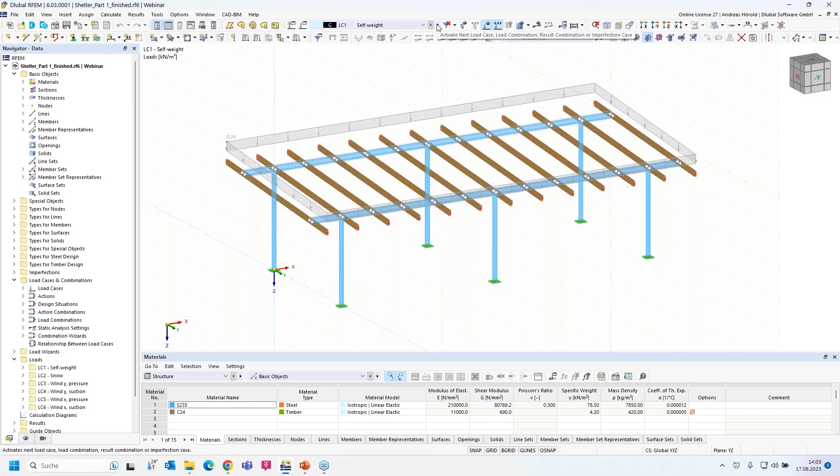Then I open the program. This is the state from the last webinar, the first part we presented last week. I created this model and the different load cases: self-weight, snow, 2 wind load cases in the Y direction, and 2 wind load cases in the X direction. I go back to what we selected last week in the base data.

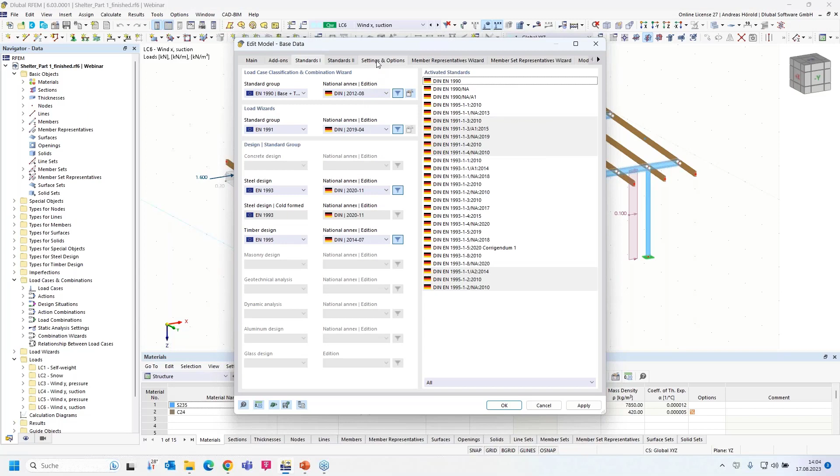I activated the 2 add-ons, one for steel design and one for timber design. Also the combination wizards are checked, and I selected the different Eurocode standards with the German National Annex. Under settings and options, I activated the member representatives and the member set representatives. I would like to design only one representative, for example, and all members with the same properties, the same length and same cross-section, are collected in one representative, and I design only that one. In the member representatives wizard, all steel and timber design properties are checked, and the same for the member set representatives. I'll leave the dialog and start applying the imperfections.

On the left side you can see the data navigator and the imperfections folder. First I have to select or create an imperfection case. I can do that with a right click and then New Imperfection Case. The imperfection case collects the imperfections.

After creating the imperfection case, I need to create the imperfections. The main advantage of the imperfection case is that you can create a group of imperfection cases. That's necessary, for example, for buckling design according to the GMNIA method. That's the main advantage.

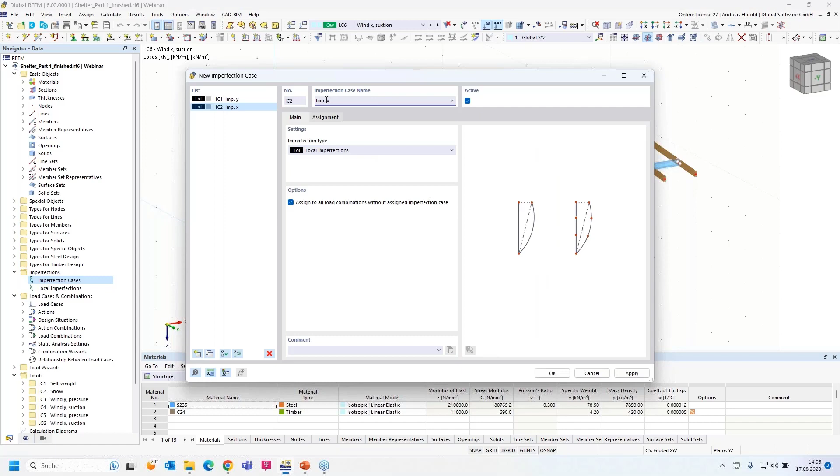So I create the imperfection case imp_y and assign this imperfection case to wind load cases 3 and 4, the two load cases with the same Y direction. Then, at the bottom left, I check 'create new imperfection case', call it imp_x, and assign the wind load cases in the X direction.

In the background, you can see the combinations are created automatically. You see only combinations with wind load cases 5 and 6, not with load case 3 and 4 anymore. Now you can check that here. Same for imperfection Y - you can't see any combination with wind load cases 5 and 6, only with 3 and 4, and of course the other load cases, load case 1 and load case 2, the snow load case.

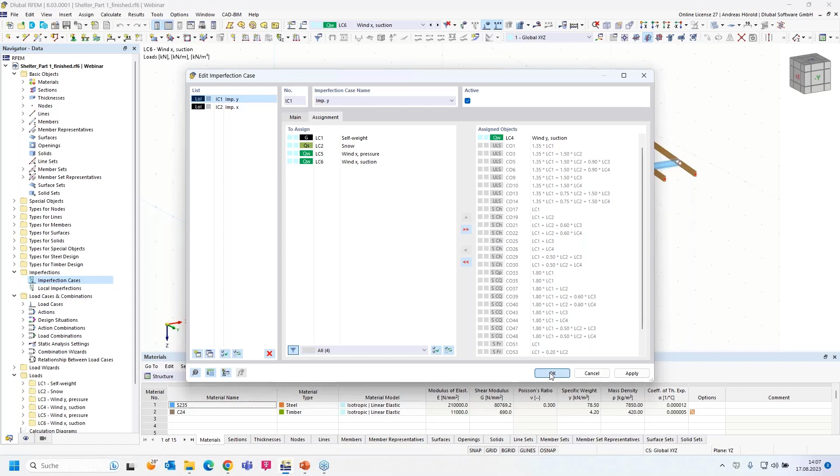I leave the dialog, and then in the data navigator I can open the local imperfections, and for example under the folder imp_y, I can create a new member imperfection. With a right click on it, I can select New Member Imperfection. The other way is to go above and select the button New Member Imperfection.

So the right imperfection case is selected. I would like to create an initial sway and assign it to the steel columns. I will use the equivalent member method in combination with imperfections and calculation according to second order theory. That's sufficient for the design according to the equivalent member method.

Okay, this definition type, Eurocode 3. The coordinate system is local xyz. I forgot to show the member axis systems. I select Y, I know that from the test.

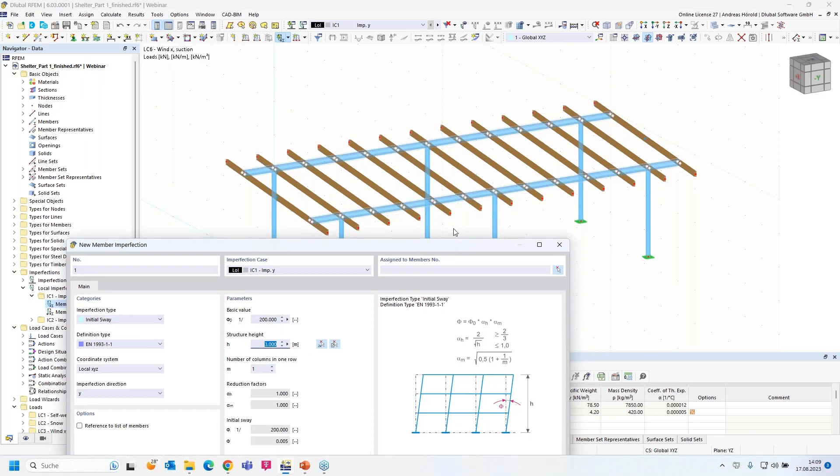So then I measure the structure height. I measure the longer column, doesn't matter that this column is a little bit shorter. Two columns should be in one row, this one and this one. And I can select or press OK.

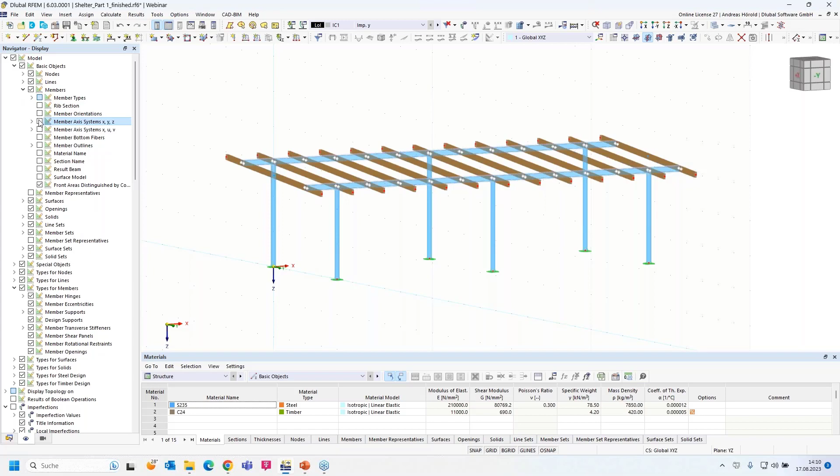And I need to select the different one. Okay, I must go in the dialog again. But before I do that, I go in the navigator display. So, and then under members, you can find the member axis system. So now you can see the local member axis system.

So now I go back to the navigator data, double click on the initial sway, and you can see the local Y direction. This direction is the same as the global Y direction. So, and I assign the different columns.

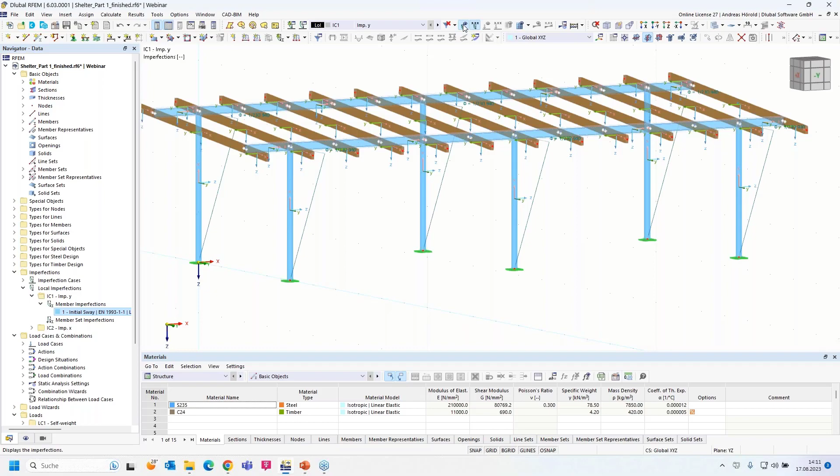Okay. And I have to select this button above, show imperfections. So the imperfections are created correctly.

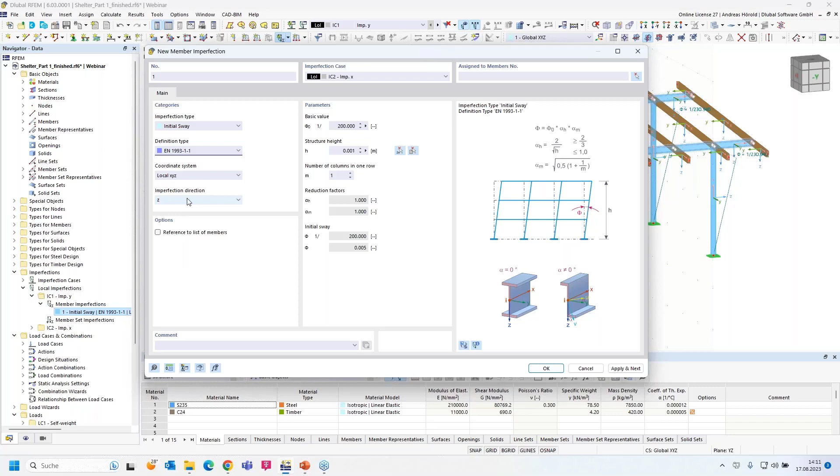So then the next imperfection, new member imperfection. This time I have to select the imperfection case 2, imp x. Again, initial sway according to Eurocode 3. This time imperfection direction z. You can see this is the local Z direction, it's the same direction as the global X direction.

Structure height is 3, and 3 columns in one row. Okay. And I select the different columns. So I select the other imperfection case, and you can see that the imperfections are defined correctly.

Okay, then we can turn to the load cases and combinations. Here on the left side, navigator data. I right click on it and open the load cases and combinations.

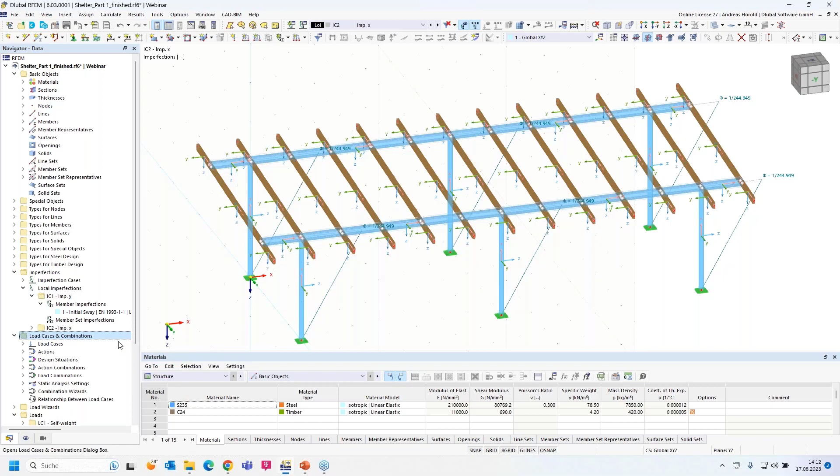That's what we defined in the base data: the Eurocode 0 and the German National Annex, and of course timber, because parts of the construction are from timber. When I edit the parameters of the National Annex, I can see the KDEF factor. It's service class 2 and it's 0.8.

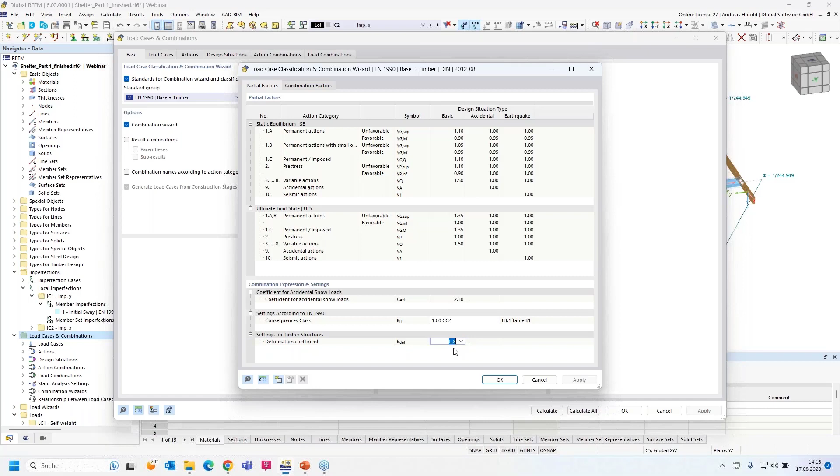Okay, so the combination wizard is activated. Those are our load cases in the next dialog. Then the actions, and for the wind load cases it's important that the alternatively action type is activated. It's done automatically, you can see the 4 different wind load cases, so that we don't have, for example, more than one wind load case in one load combination.

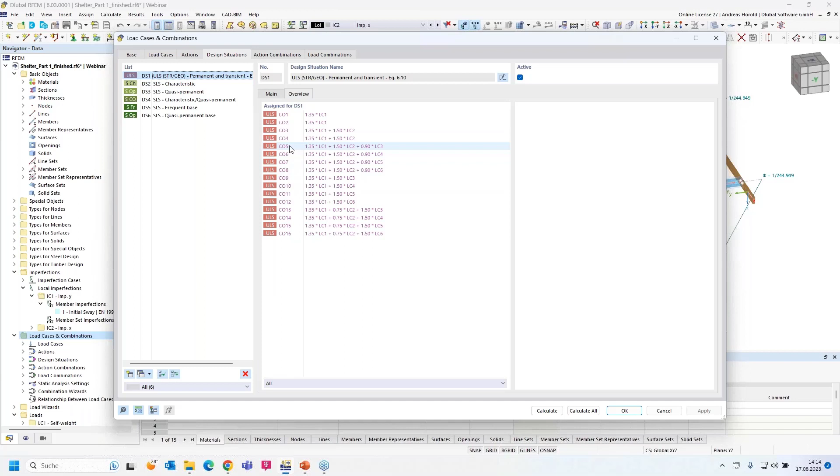Then the design situations: 1 for the ultimate limit state design and 5 for the serviceability limit state design. If you click on one of them, you can go to the overview and see the different assigned load combinations.

And in this dialog, you select or activate the add-ons. You can also assign concrete design. If you activate the add-on, we activate, for example for the ultimate limit state design, the steel design and timber design add-on. Let's go to the action combinations.

And it's the important thing, the load combinations for ultimate limit state design and serviceability limit state design. At the moment we have got 60 load combinations.

Let's go back to the design situations. Of course, we will activate the steel and timber design for the ultimate limit state design. For design situation number 2, the serviceability limit state design characteristic, we also activate steel design and timber design. Yeah, that's all for the steel design.

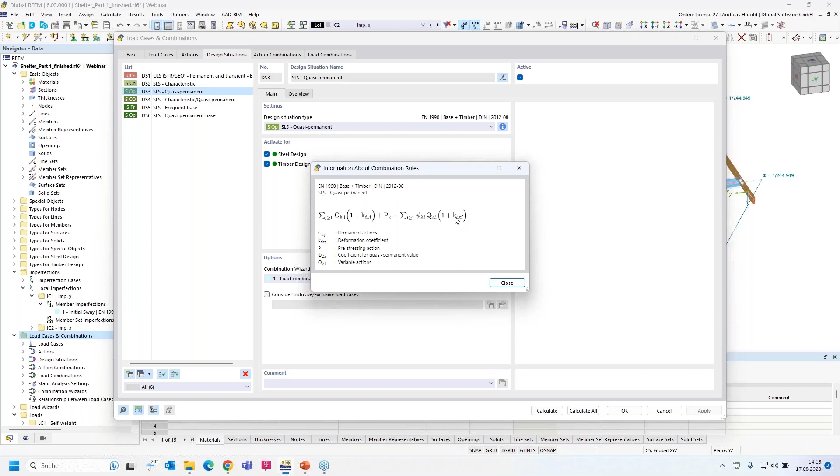And we check if we need this serviceability limit state design quasi-permanent for the timber design. I go to the info button, and you can see in the combination rules the KDEF factor, what's quite important for the timber combinations. That's why we need this design situation for the timber design.

You can leave the dialog, uncheck the steel design. We check the same for design situation number 4, information, and we can see the KDEF factor again. That's why we need it also for the timber design.

And we don't need it for the frequent base. You can't see the KDEF factor here. So that's why I delete these 2 design situations.

So again, this design situation, design situation 3 for timber design, and 4 also for timber design. With the Shift key, I select the 3 serviceability limit state design situations and check the geometrical linear analysis. And for the ultimate limit state design, the second order theory.

So now we go back to the load combinations, and you can see there are 45 load combinations. Let me check if all is correct. Yeah, all should be correct. So that's all for the combinations.

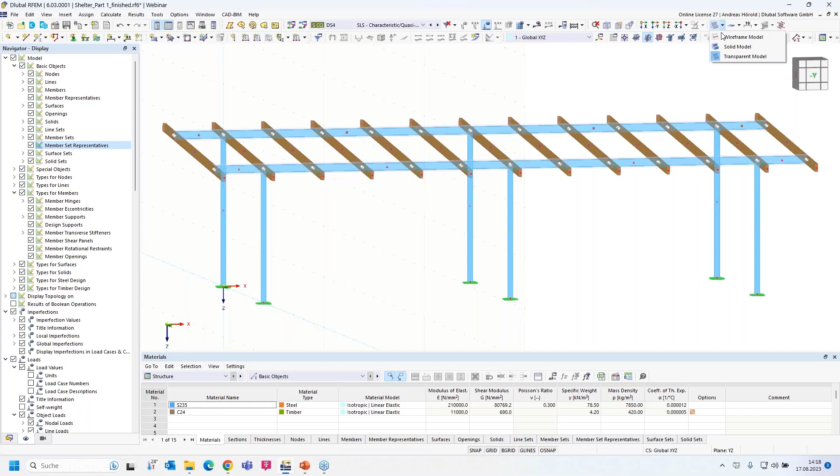You can see these 3 columns are in a group, in the same group. It's the same member representative, member representative number 4. Now you can see that in the different color of the points in the middle of the member.

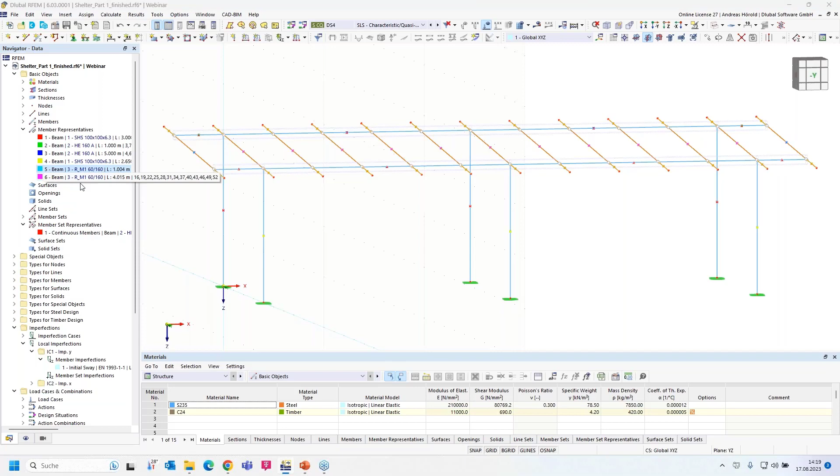So I go left on the bottom in the navigator data to the member representatives and the member set representatives. That's the timber representatives. You can see that's the cantilever beam, and that's the inner beam here. And I start with this inner beam made of timber.

Okay, then I go to the design type. You can see the service class number 1. That's not correct. I edited the service class with that button and change the service class to moist.

You can see this preview image. That's what valid for our structure. You can see the timber structure on the outside, but there's a roof over the timber structure. That's the case for our structure.

Okay, I don't define any effective lengths. We don't do stability analysis for the timber beams. I assume that I've got formwork, nailed formwork of timber on the upper side of the purlins, or a stiff plate nailed on the upper side of the purlins. And it should be quite stiff.

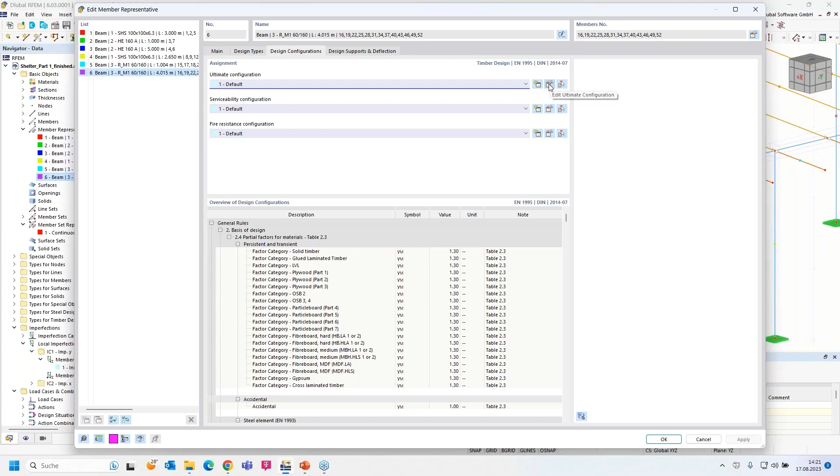So I go to the design situation, ultimate configuration, select the edit ultimate configuration, and I uncheck the stability analysis. Okay, and yeah, we leave the standard parameters. I apply with OK.

So I go back to the design situation, serviceability configuration. I press the edit button, and I leave the parameters from the standard. Okay, and we don't perform any fire resistance design.

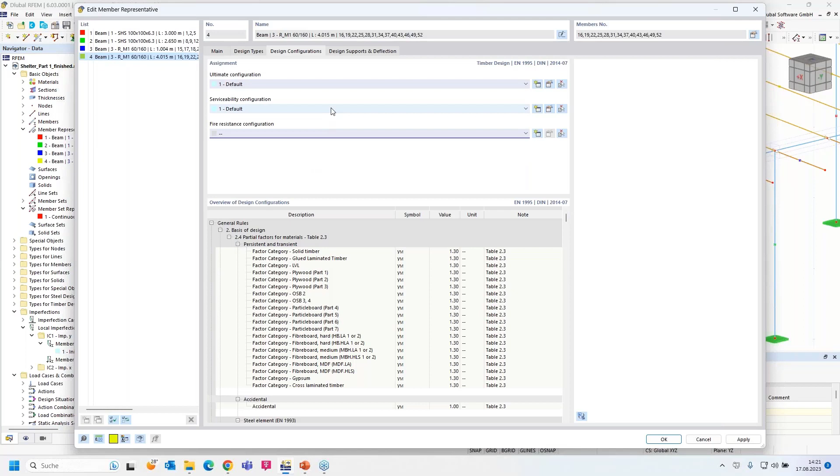So the next dialog is the design supports and deflection. Now I have to enter a support at the member start and the member end. I press this button, create new design support for member start. The type is timber, direct support. The support length is 160 millimeters.

Yeah, that's the width of the steel beam, the HEA 160. The support width is equal to the width of the member, of the timber member. If you change the width of the timber member later, it will be calculated automatically or changed automatically.

It's an inner support. We do the design only one time for this member and not for the cantilever beam. And we say it's an inner support, that the program uses the complete length or the complete width of the support. In our case, the steel member.

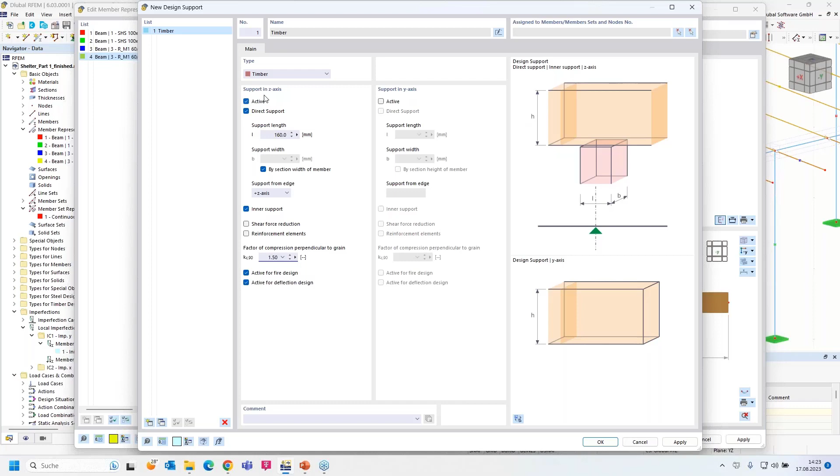So I need to define the factor of compression. I select 1.5, softwood, discrete supports. Okay, so it's only supported in Z direction. Okay, so the design support should be at the member start and the member end.

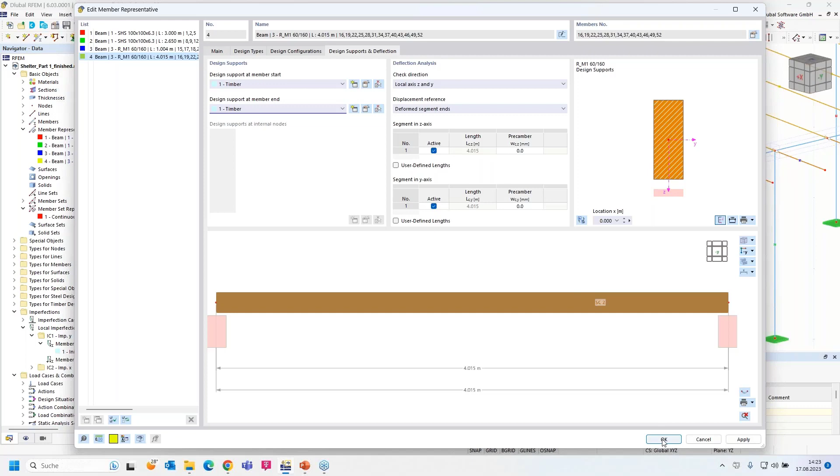Okay, yeah, that should be all for the timber design, but I checked the beam number 3, the cantilever beam. Design types, the same service class 2, the same design configurations, no fire resistance design, and we don't need to define any support. We design the support with the beam number or the member representative 4. Okay, that's all for timber.

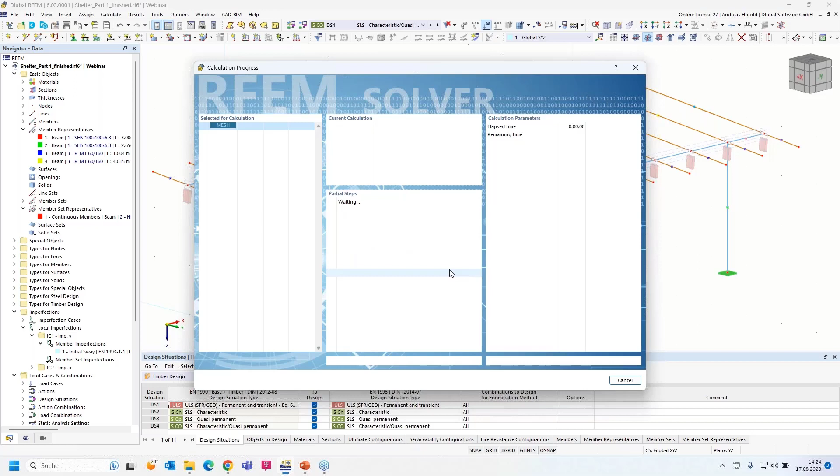I can run the calculation here in the table on the bottom, timber design. And I press this button, show results. And this runs the calculation. The program calculates all combinations, but simultaneously, it's a new feature in RFEM 6, a multi-core calculation.

My computer has more than one core. That's why the combinations are calculating in parallel. So I show the design ratio on members.

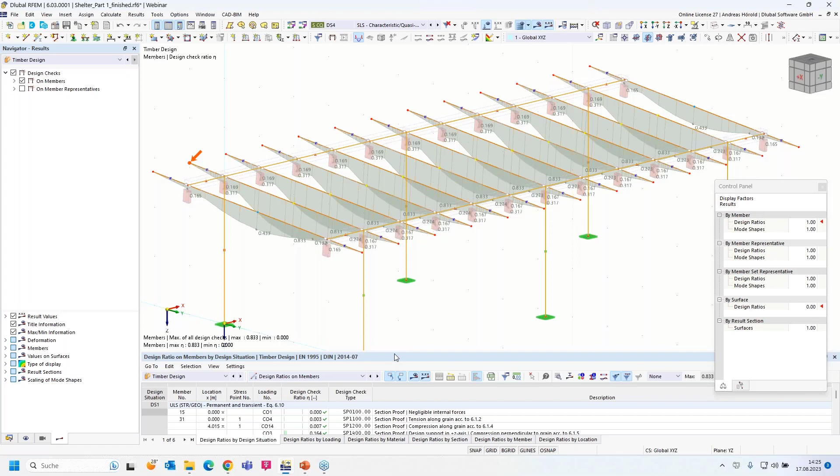You can see the different design ratios: 68% for the serviceability limit state design. No, the maximum is 83 for the serviceability limit state design. If you double click on the line, a new table is opened.

You can see the design formulas, also the equations from the standard. Let me select another one, maybe a section proof, for example, this.

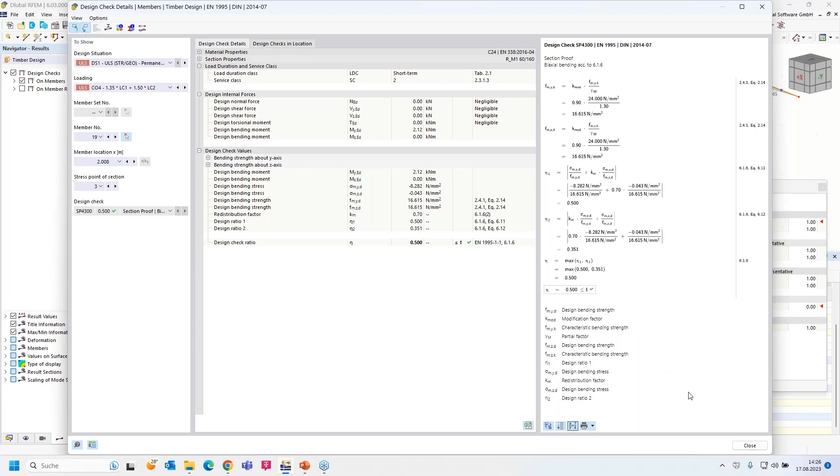I can double click on the line, or I can use that button, design check details, and you can see the equations from the standard. Complete design. You can print it directly with that button, print graphics to printer, and print graphics to printout report. A very nice new feature of RFEM 6, often wished from our customers, and we implemented it for RFEM 6.

Okay, that's all for the timber design. We continue with the steel design.

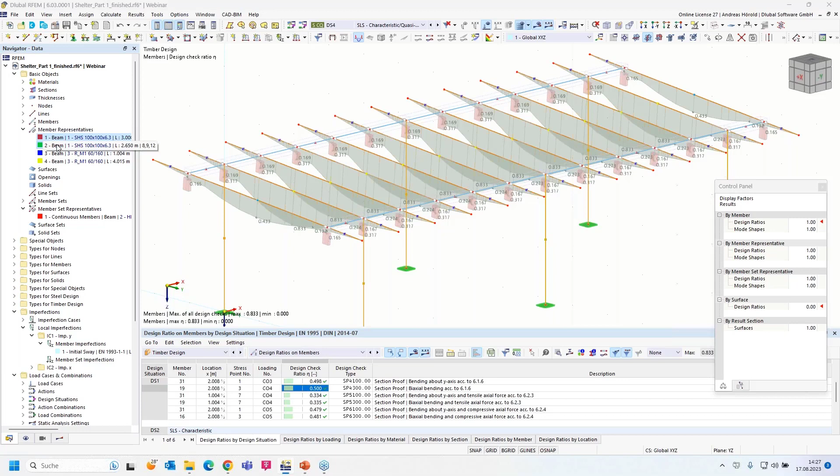I select the member representatives 1 and 2 and do a right click, edit. Those are the columns. You can see them on the cross section.

Design types. I select the effective lengths. As I already said, I will use the equivalent member method. That's why I have to create effective lengths. Another way would be to use the general design method.

Then you need to define boundary conditions. So I create a new effective length.

The flexural buckling and torsional buckling should be designed. I check all. So I leave the member lengths by 1. The effective length factors, SK, should be equal to the member lengths.

Because I assigned imperfections and used the second order theory for the ultimate limit state design, that's sufficient if I leave the member lengths to 1. Okay.

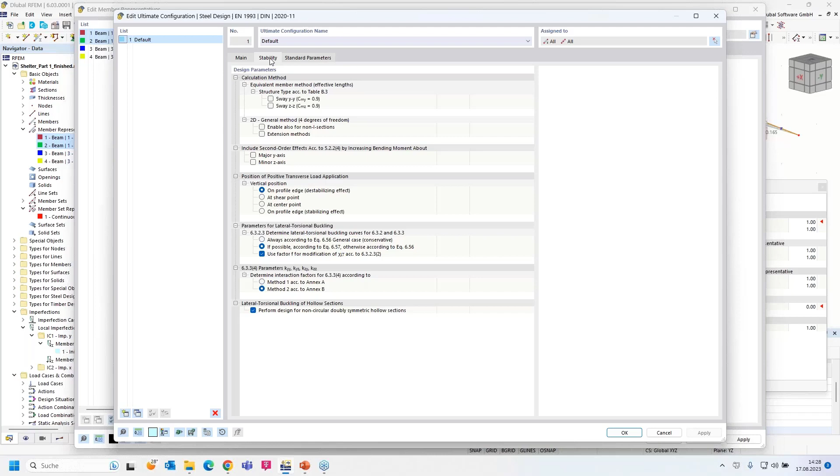So then design configuration, default. I go to the edit button. I perform a stability design and I leave all checks as they are.

Apply with OK. Serviceability configurations, let me check it with the edit button. And I leave the standard parameters as they are. I don't do a fire resistant design.

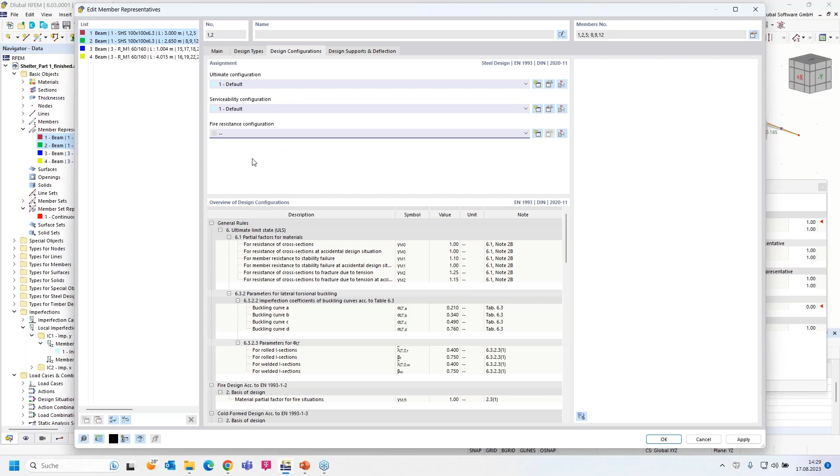So then design supports. I have to create a design support at the member start. I see it as a cantilever column, which is rigidly supported at the member start.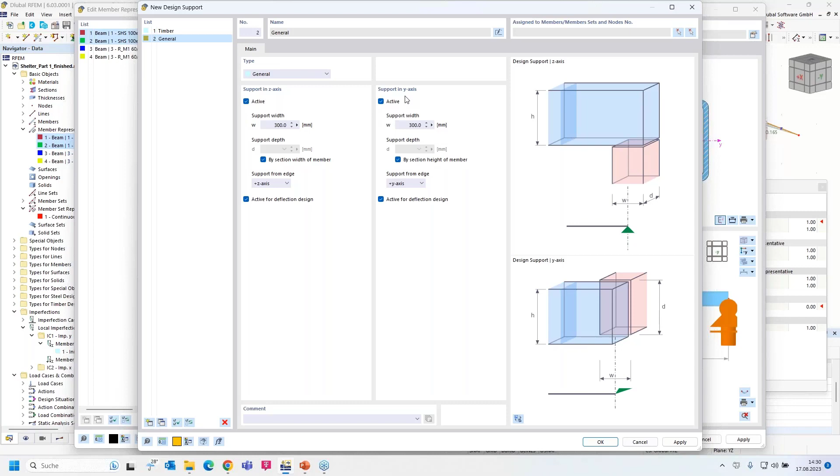So new design support, general support, and I leave all parameters as they are, but I select it for both directions, for the Z axis and the local Y axis. Okay, but only at the member start. You can see that in the preview.

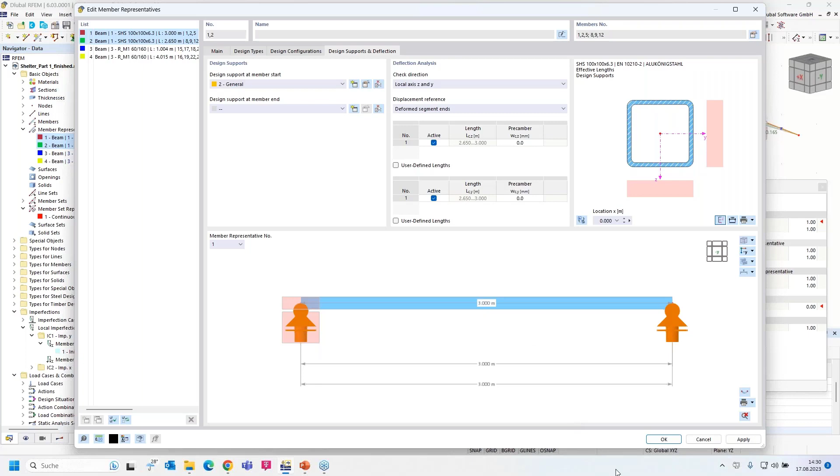So that's all for the member representatives. You can leave the dialog. All results are deleted. And I continue. I deselect the results. So I continue with the member set representatives.

These two sets of members are contained. I double click on it. So, and I can see there are no design tabs here. I leave the dialog.

I select the member sets, or they are selected. I double click on one and I have to check or set this check here, design properties. Now it would be also possible to enter here the design types, the design configurations, and so on. But yeah, I will use the member set representatives. I'll leave the dialog.

Double click on it. Select the design types. I will use the equivalent member method again. Create a new effective length. Nodal supports and effective lengths.

So, and with this button, I select one set of member. And I can see there are only 3 inner nodes. And that's not correct. I leave the dialog. Okay, I can see only 3 nodes. We check why.

As I copied the purlin in the first part of the webinar, the member wasn't divided, and now this node is missing for my set of member. So I'll correct that.

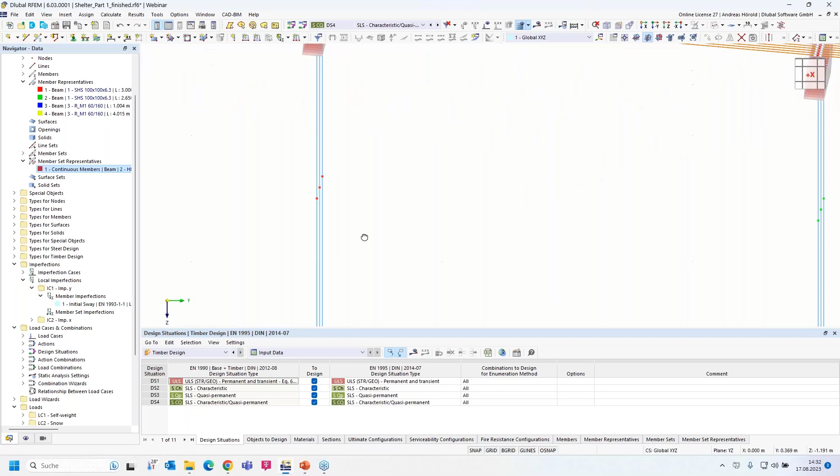I use this function here right above, connect selected lines, members, and so on. I select it. Okay. So, and select this member and this member. Okay. And now the member is divided.

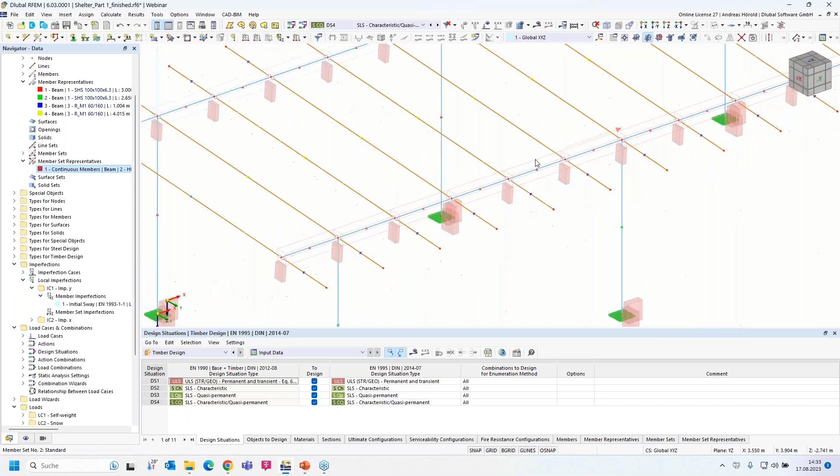There are only members with a length of 1 meter, but the member set is still the whole beam, or all the beams are collected in 1 member set. Same on the other side.

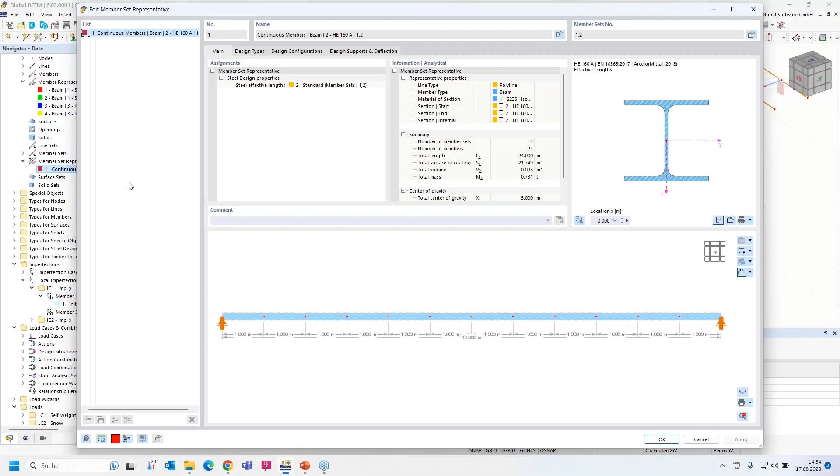Okay, I turn back to the member set representative, double click on it. So go to the design types, and I edit the effective length.

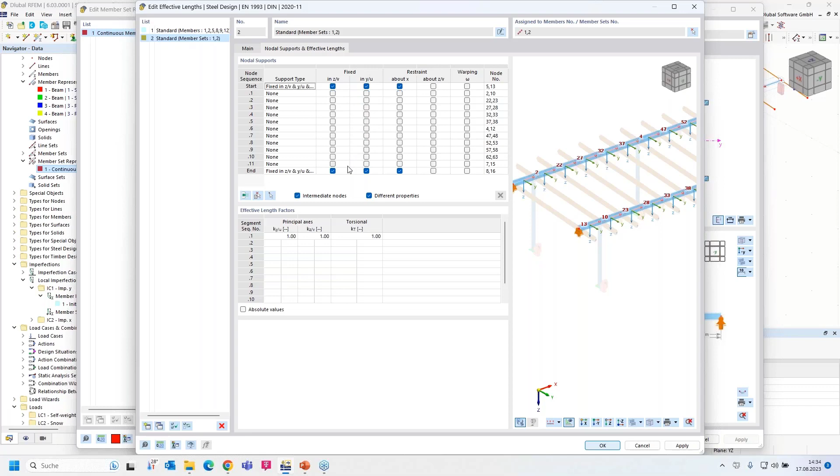Click on the one member set again. Now our inner supports are here. I can open the preview at the bottom and you can see the two member sets. Now I can select more than one node and assign different support directions, using this button to select nodes.

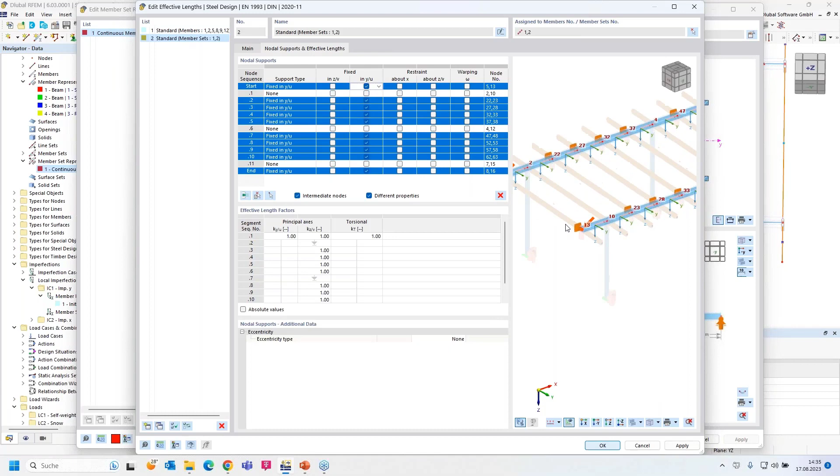I do that for only one set of members. So this node, these inner nodes, and this node - all are selected, and I check only the support in the Y direction. You can see in the preview that this is okay.

Now I use this function again, select nodes. I select this node over the column, the three nodes over the columns. It should be fixed in Z, Y direction, and about the X-axis. It should be a fork support. So now all is correct for both sets of members.

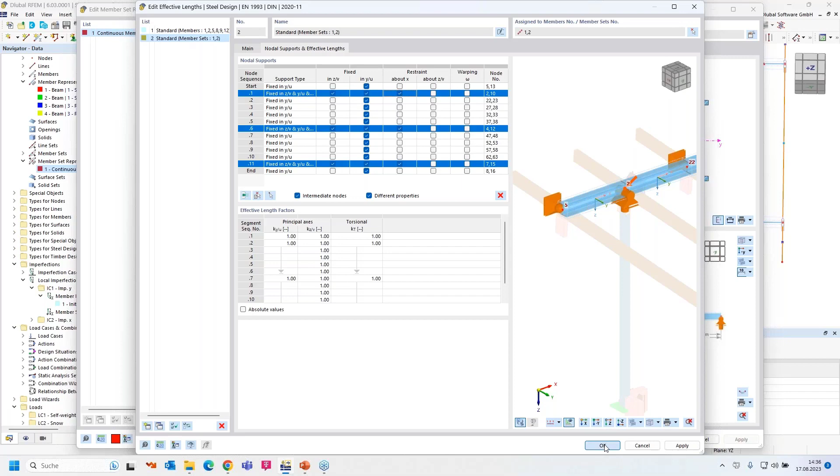And we collected it in one member set representative. I can leave the dialog with OK, and you can see in the preview again that all is defined correctly.

So then, design configurations. We leave the same configurations for the ultimate limit state design and for the serviceability limit state design, and we don't perform any fire resistance design.

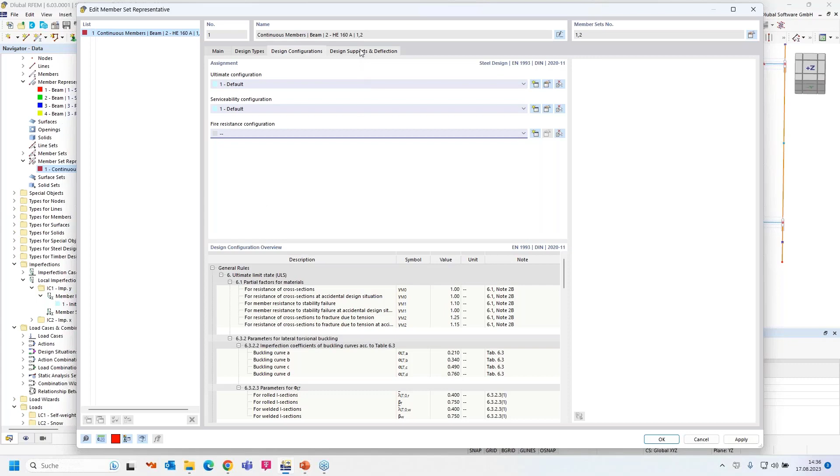Okay, then we have to define supports, or design supports. At this point, general, use the general design support - in this point over the column, and in this node over the column.

And we check the direction. It should only be designed, or the serviceability limit state design should be performed only in Z-axis, because we have the stiff purlins and plates on the upper side of the cross section. Okay, that's all, we can leave the dialog.

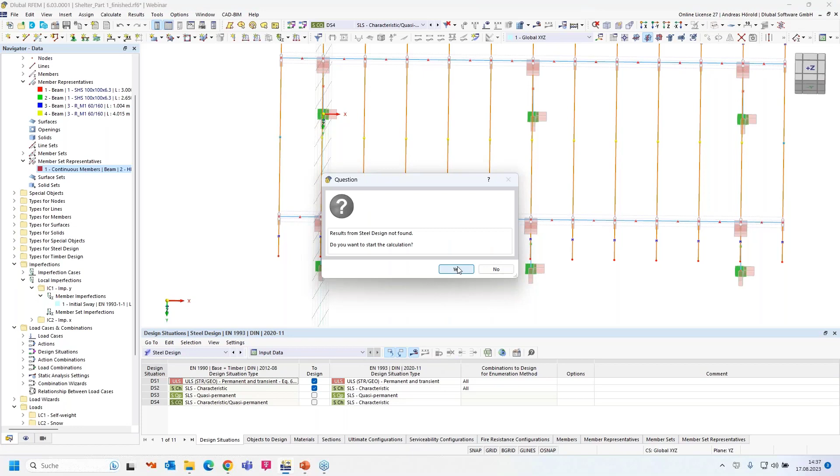And run the steel design calculation. Press this button here on the table. All load combinations need to be calculated again, but with the multi-core calculation that's no problem.

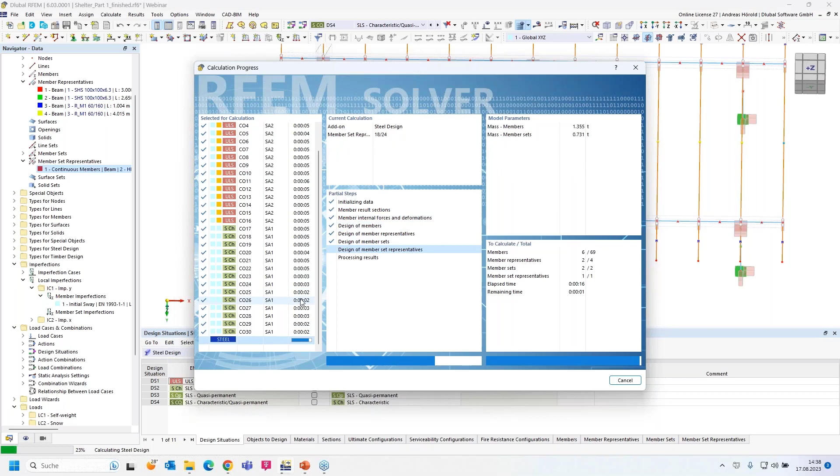Now you can see our results for the steel design. Let's go to the table, design ratios on members. So the maximum value is 49%, it's the deflection in Y direction, global Y direction, for the column.

Okay, so let's select design ratios - design ratio on members, it's okay. By cross section, let me check. I can do that with the member representatives. Design ratios by section - that's the column.

Okay, and member set representatives by section - that's the horizontal beam, and you can see the maximum design ratio. It's about 25%. I think a smaller cross section is sufficient.

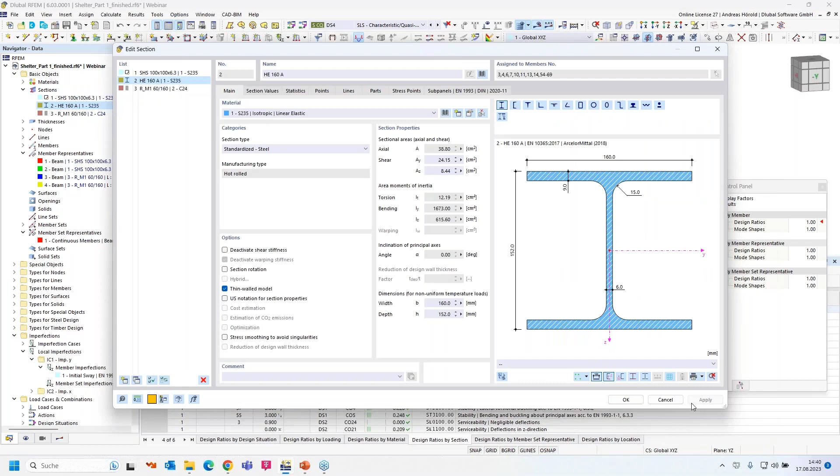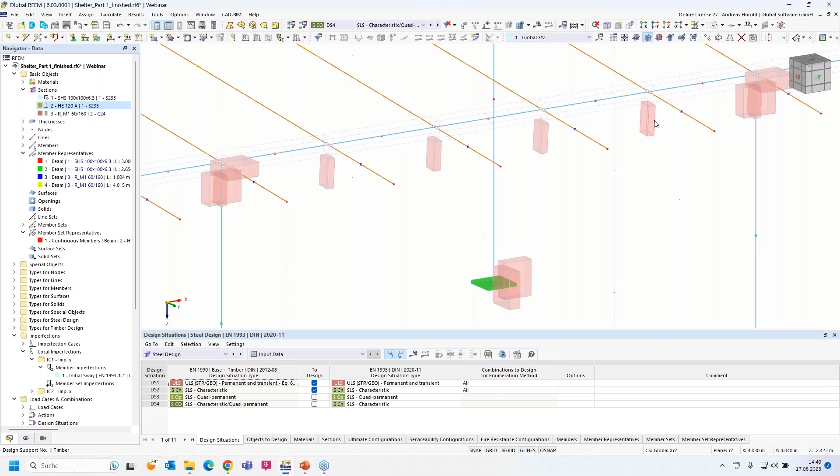So that's all, but you need to consider that we need to modify the design support, because the support length isn't 160 millimeters anymore. Now we've got 120 millimeters, and it's now correct for all design supports.

Okay, then we run the calculation again. With that button, you can run all calculations, the load combinations, design situations, and the steel and timber design in our case.

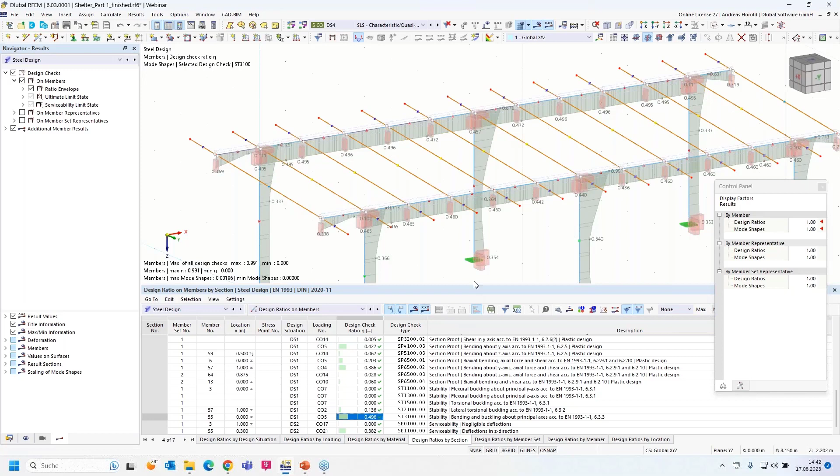So then let's check the design ratios - steel design. Here, design ratios by section: the column, almost 100% for the serviceability limit state design, and the horizontal beam has got a design ratio of almost 50%. Maybe we can optimize the column, or not the column but the horizontal beam, but I leave it as it is, the construction. So okay, that's all for the design.

Now we will create a printout report. At first, I would like to print the steel design graphic and the timber design graphic in the printout report directly. Let me switch off the design supports.

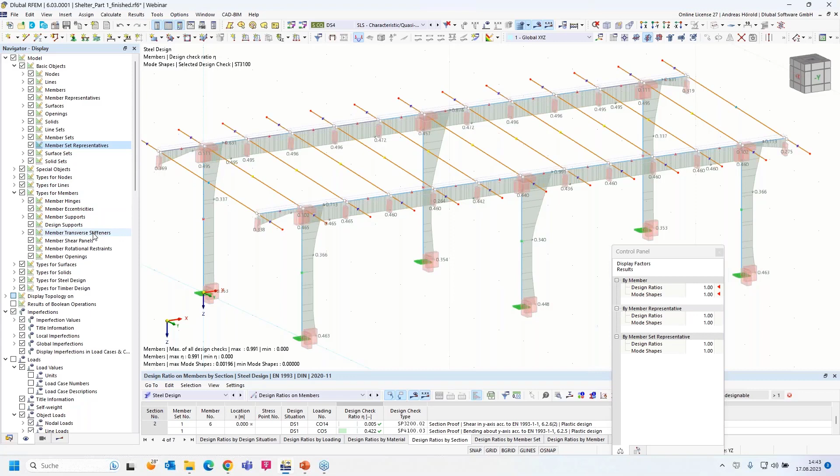I turn to the navigator display. Sometimes you can't find any part of your structure if you want to deactivate it or disable it, but you can find it. Then I have got a tip: when you do a right click on, for example, the design support, you check the display properties.

So, those are the properties for the design support. But what I need is the structure of the folders - where can I find the design supports? You can see you can find it under the types for members, and it has got nearly the same structure as in the navigator display. You can leave the dialog, types for members, and you can see the design supports, and I can uncheck it.

So, okay, let me print this graphic. Left above, you can find this button - you can print the graphics directly to the printer, to a PDF, or to a 3D PDF. I use the function print graphics to printout report.

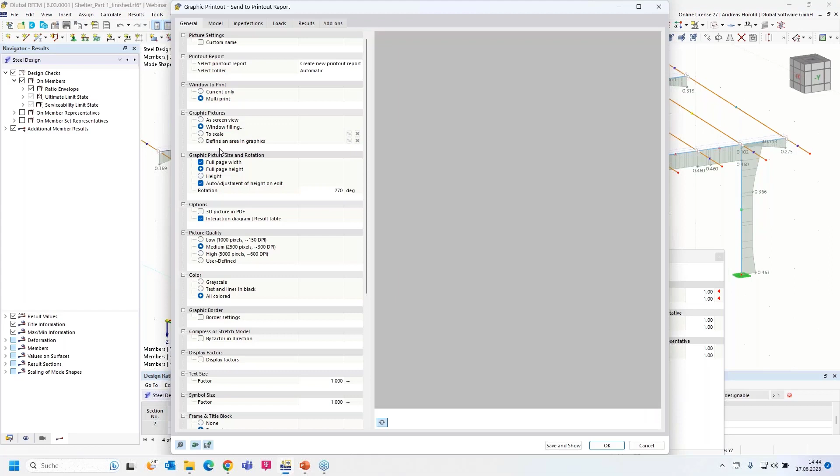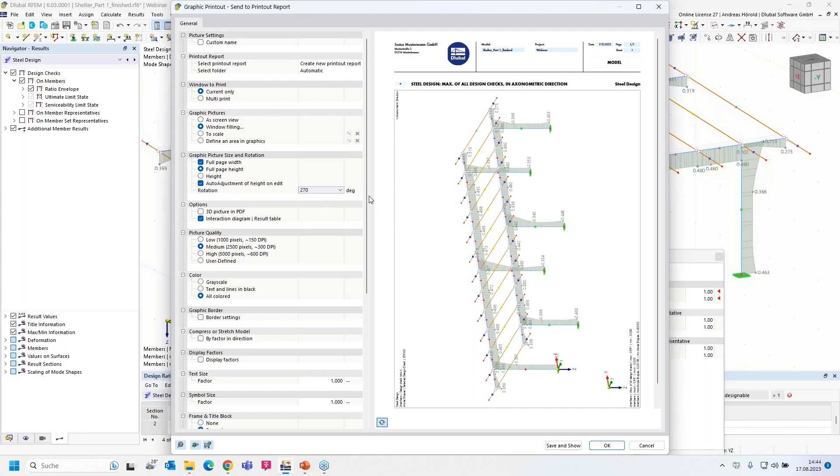I check current only, it's already rotated. That's 0 degrees. And I would like to rotate it clockwise 270 degrees. Okay, I press OK.

And now the printout report manager was opened. I have to enter a name, printout report 1, and can check the different report items. Let me go through them. I leave the first entries.

Maybe we check the loads for the different load cases. That's quite new in RFEM 6, the parts list. Let me print some parts list or lists.

So we leave the static analysis results. Then there's the folder for the steel design. Let me increase the window. That's also a new feature of RFEM 6.

So, and I would like to print only the design ratio on representatives by sections or by section. So I uncheck the others. Okay. So, and design ratio on member set representatives by section.

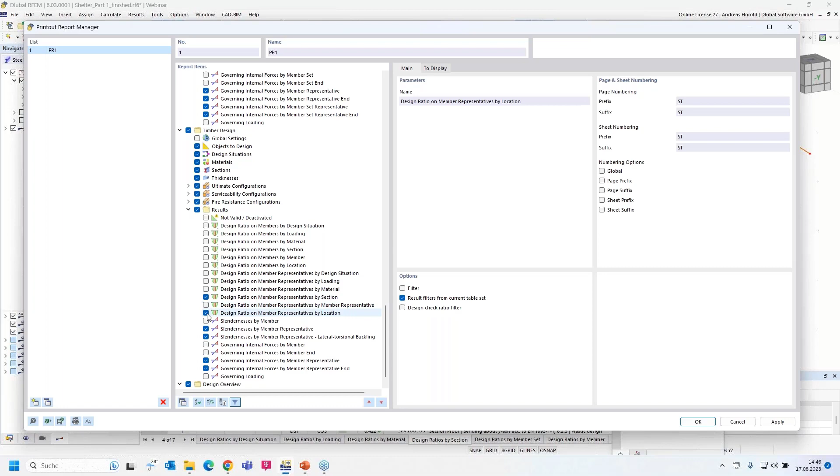So then timber design, the same. Design ratio on member representatives by section. Oh, that's sufficient.

Okay, we can leave the dialog. We don't open the printout report. Parts of it were created. We print the next graphic manually.

Here, timber design, left above, and the navigator results. The ratio envelope. So I move it a little bit and go above to the print graphics to printout report. Same workflow, same rotation.

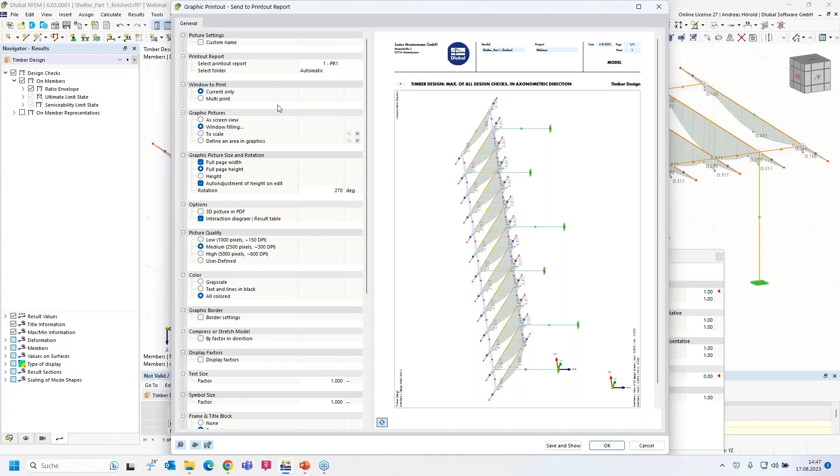Okay. So, and now we would like to use the isometric view for a multi-print. I select print graphics to printout report again. And I select the option multi-print.

And now you can see different dialogues on the top. Model. We would like to print the isometric view of the model, the current view. Then imperfections. I select them all, means 2 imperfections, the current view.

Loads. Not all items, I select the 6 load cases. Okay, current view. You can also check other views, in our case without imperfections. That's also only an example. You can print what you want, but I would like to show you how you can print several graphics in one step.

So load case and combinations. I select only the design situation number 1. I'll remove the load case with that button, and I select the design situation number 1. Okay, current view.

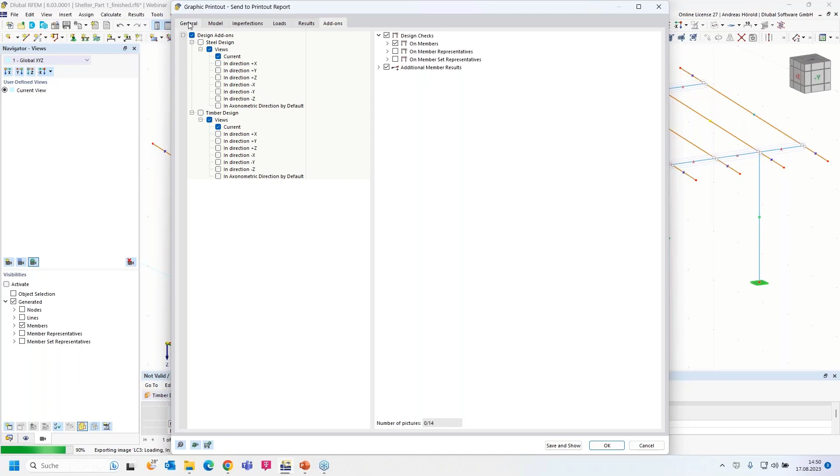Now if I go back to the general view, so you can see the previews of the different pages, the model, imperfections, and the loads.

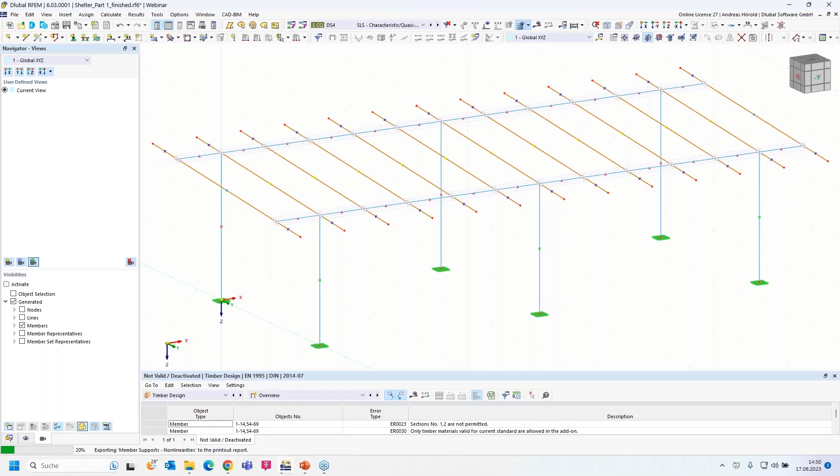Okay, now I press OK and show, and the printout report with all graphics is created in some seconds. Okay, that's the printout report.

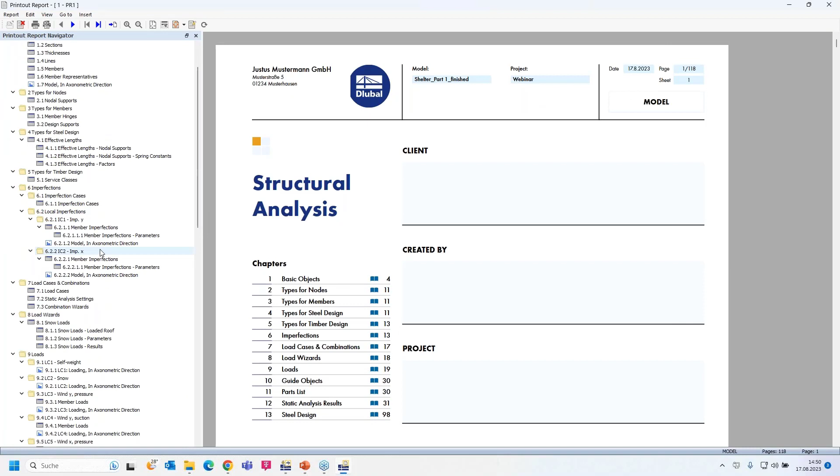A new important new feature is that you can work in the printout report and in the model in parallel. Yeah, I can show that like this on one screen. A new important feature. So, and let me show the different graphics.

They are on the right place. The model under the base data folder. Then the imperfection graphic under the imperfection case and under the local imperfections. Okay.

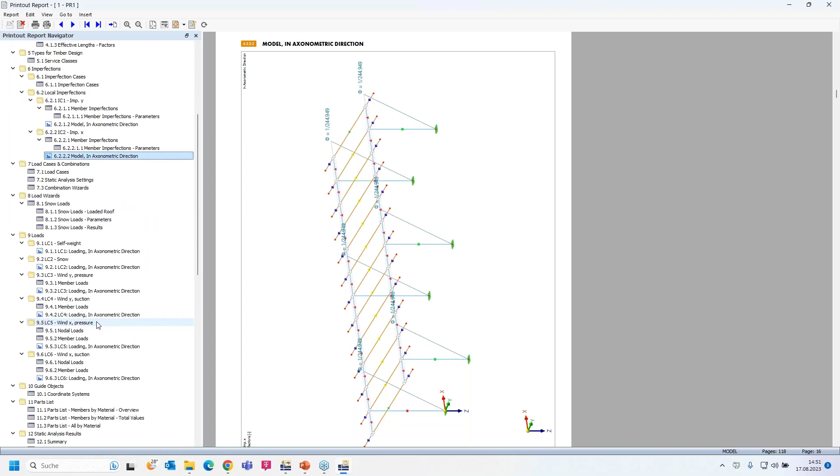Then the different load cases under the loads. Okay. Then under static analysis results, you can see the different graphics, N, V, and M. So, and under the folder timber design, for example, you can see the timber design graphic.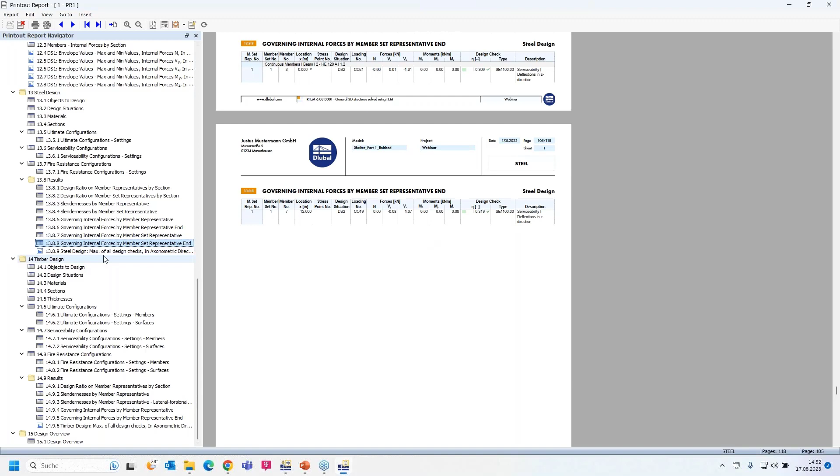And I skipped the steel design. That's the graphic for the steel design. So before the graphic, you can see the tables with the results of the design.

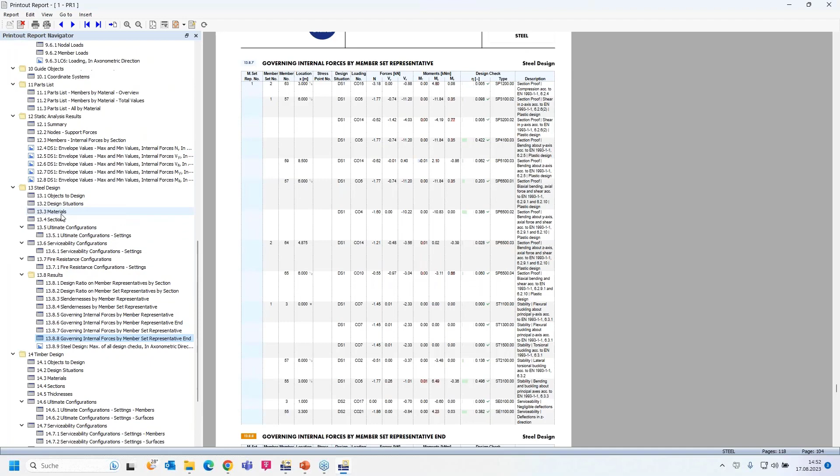Okay, let me show you the parts list. Yeah, parts list member by material overview. This graphic, I can zoom a little bit in with the control key and the mouse wheel, for example, or with the buttons above, zoom out and zoom in. Oh, that's all okay.

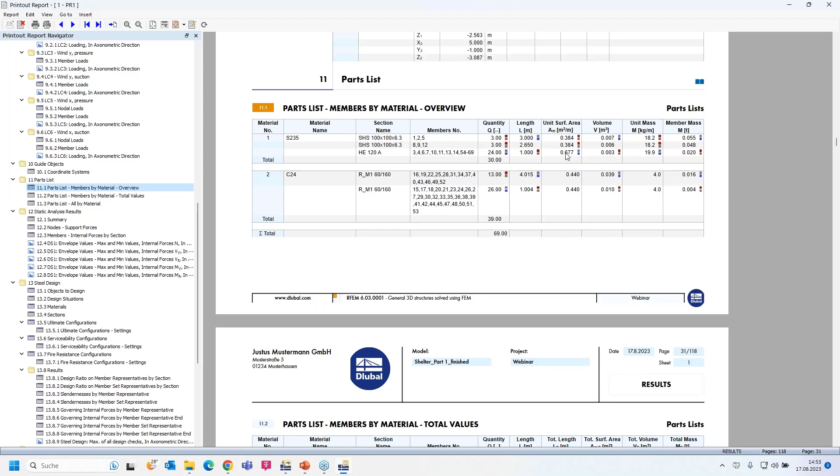Yeah, and you can see the different lengths of the members, the sum of the steel parts and the timber parts, and the sum of all the unit surface area, for example, and the unit mass, and so on. Okay.

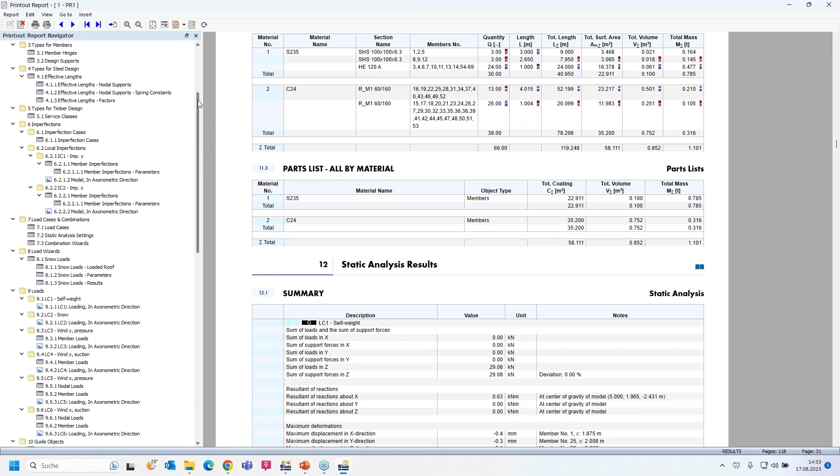So then let me turn back to the cover. It's the start of the printout report. You can modify the cover, you can enter a client and so on. I right click in the menu here, press edit. You can select the preview image,

or deselect it. I enter a client, John Doe, created by me, Harold, and the project, we call it roof on market.

So, okay. That should be all—or we don't call it roof, we call it shelter. Shelter on market, okay.

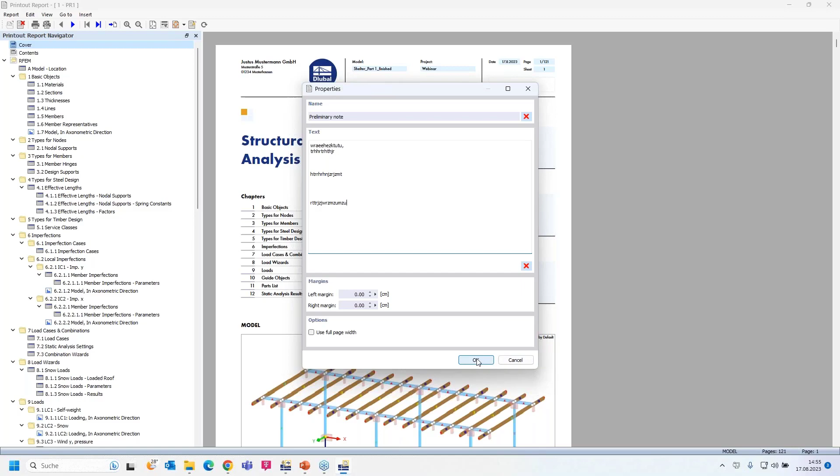It's added at the end of the printout report. You can see the preliminary notes. So I moved the item to the document start. So that's the content, and you can see the preliminary notes here. Okay, let me go back to it.

Oh, it's okay. So you can enter properties, so you can change the text anytime.

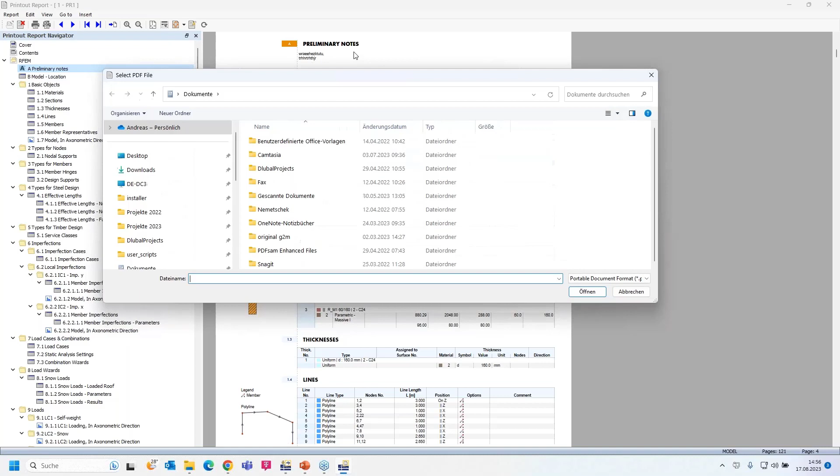Then I insert a PDF. From my desktop, I prepared a PDF from our Geo-Zone Tool—I think you know that from our website. I can enter all pages or a selection of different pages. I press the OK button, and then the PDF has been added at the end of the printout report.

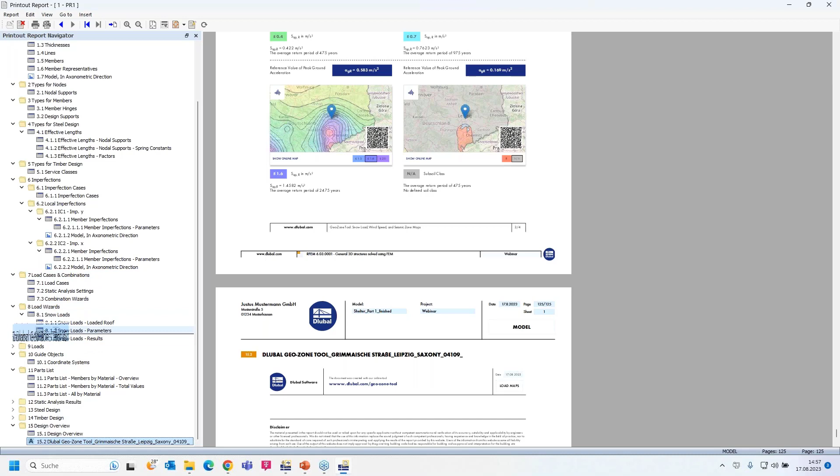I can move that, for example, also with drag and drop. Let me do that. I close these folders and move the PDF before the load wizards. Now you can see the PDF here.

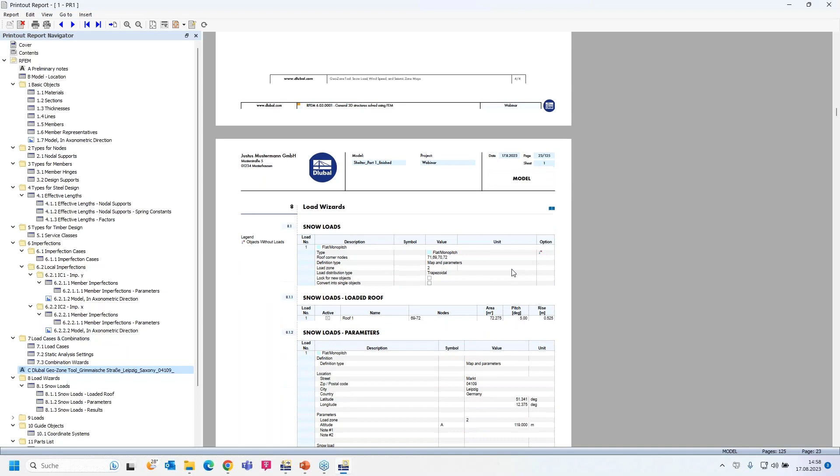And then the load wizards follows, now also with the location and so on.

Then edit—okay, that's also quite important. You can set a language. You can translate, or the program can translate the printout report into 10 different languages. It takes only some seconds to translate such a report, for example into French, Spanish, German, etc.

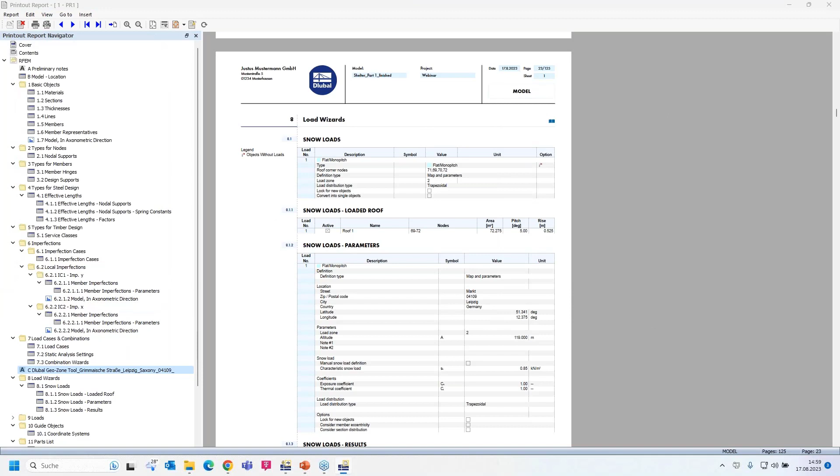Then report: you can print the report directly, or export it to PDF or to HTML. Let me export it to PDF, to my desktop, PR1, printout report 1. I save it.

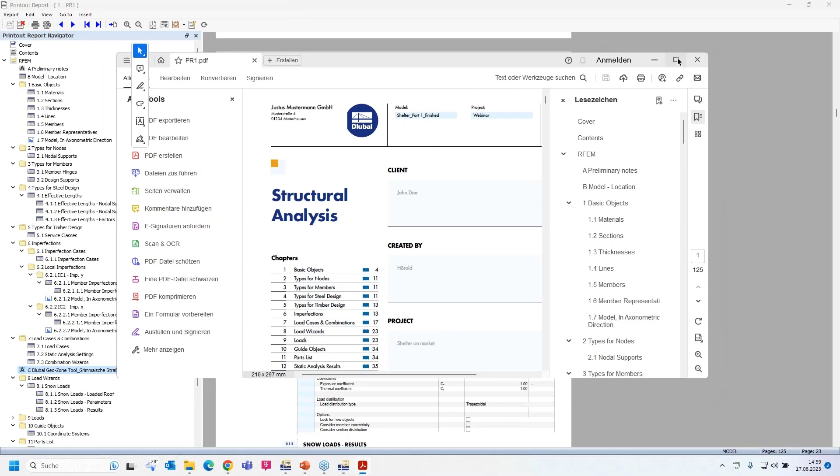The PDF is created, and I open it. You can jump between the different chapters on the right side. All tables, sheets, and graphics are printed in the PDF.

Okay, yeah, that should be all for the presentation.